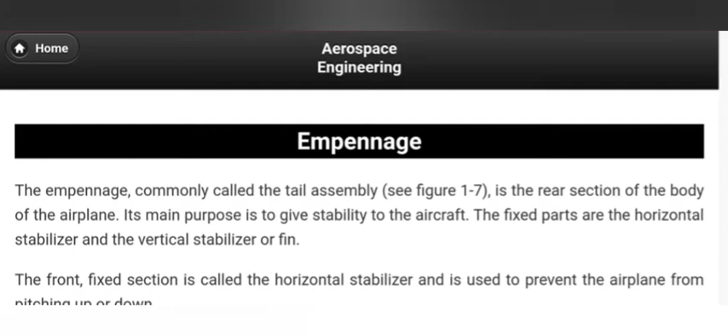The front fixed section is called the horizontal stabilizer and is used to prevent the airplane from pitching up or down. The rear section is called the elevator and is usually hinged to the horizontal stabilizer. The elevator is a movable airfoil that controls up and down motion of the aircraft's nose.

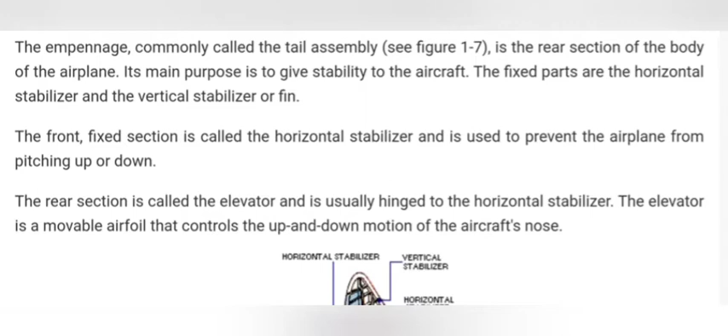The vertical tail structure is divided into vertical stabilizer and the rudder. The front section is called the vertical stabilizer and is used to prevent the aircraft from yawing back and forth. The principle behind its operation is much like the principle of a deep keel on a sailboat.

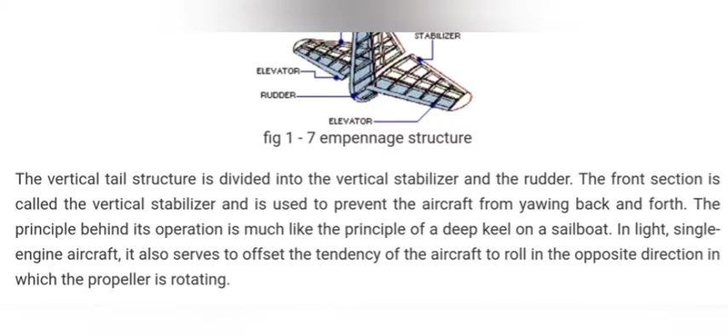In light single-engine aircraft, it also serves to offset the tendency of the aircraft to roll in the opposite direction in which the propeller is rotating. The rear section of the vertical structure is the rudder. It is a movable airfoil that is used to turn the aircraft.

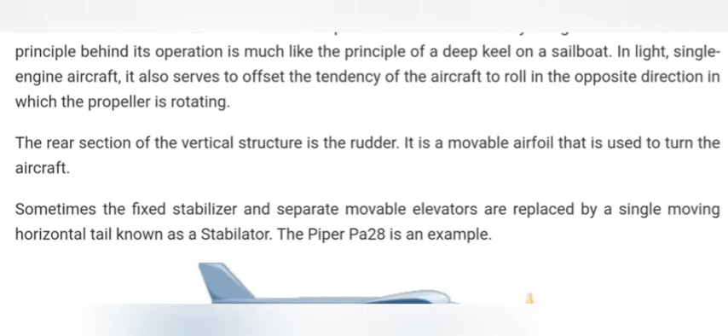Sometimes the fixed stabilizer and separate movable elevators are replaced by a single moving horizontal tail known as a stabilator. The Piper PA-28 is an example. The picture shown is the column in straight and level flight. Pull back to climb, push forward to descend.

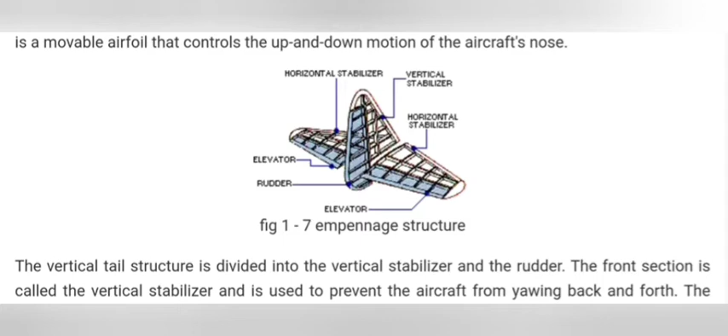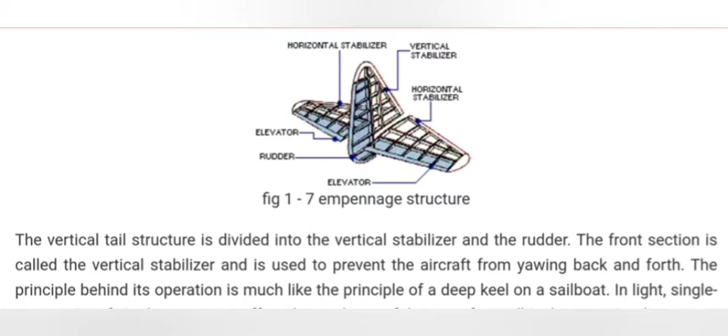This picture shows the tail section having a horizontal stabilizer, vertical stabilizer, and an elevator attached to the horizontal stabilizer and a rudder hinged to the vertical stabilizer. The rudder is used to turn the aircraft left and right, that is called yawing, and the elevator is used to pitch the aircraft up and down.

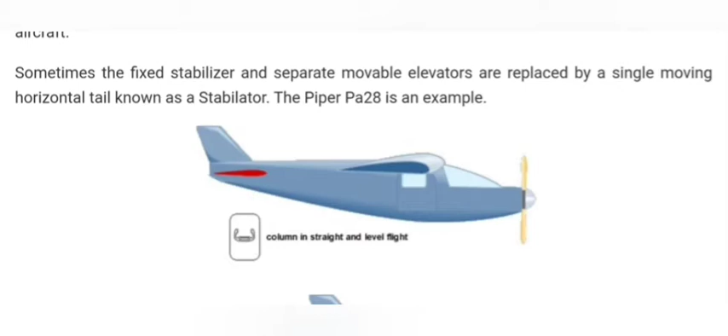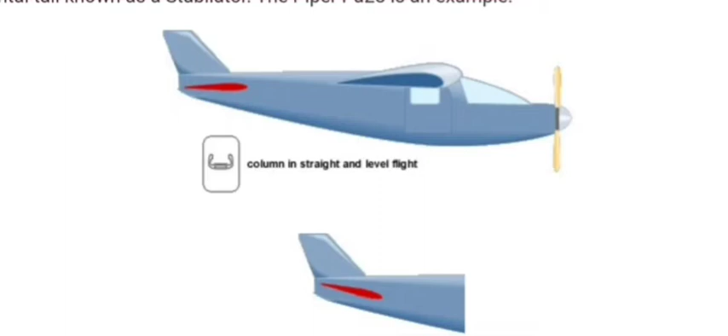The fixed stabilizer and separate movable elevators are replaced by a single moving horizontal tail known as a stabilator. Piper PA-28 is shown in the example. If we don't move the control stick, the flight will be straight and stable. It is in level flight.

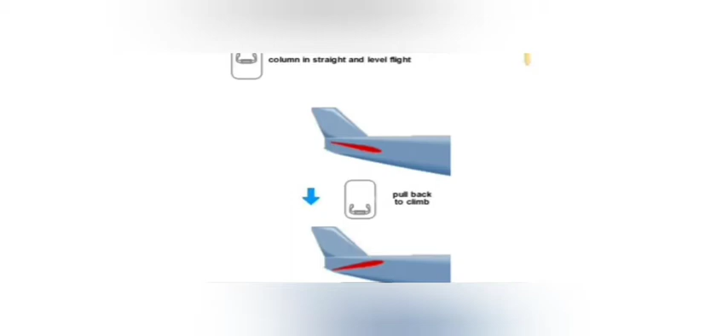If we pull back the control stick, the aircraft moves upwards. That is, if we pull back the control stick, the aircraft pitches up. If we push forward the control stick, the aircraft moves down, that is, the aircraft descends.

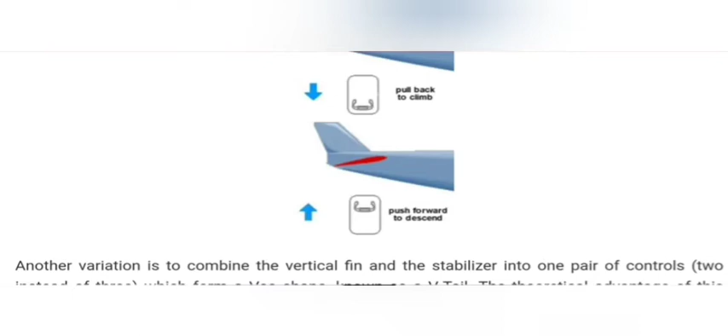Horizontal stabilizer moves downwards. Another variation is to combine the vertical fin and the stabilizer into one pair of controls, 2 instead of 3, which form a V shape known as a V-tail. The theoretical advantage of this design is the reduced interference drag associated with 2 surfaces instead of 3. On the V-tail, the combined rudders and elevators are known as ruddervators.

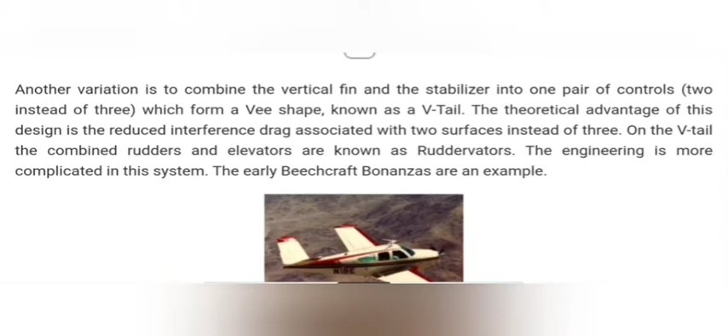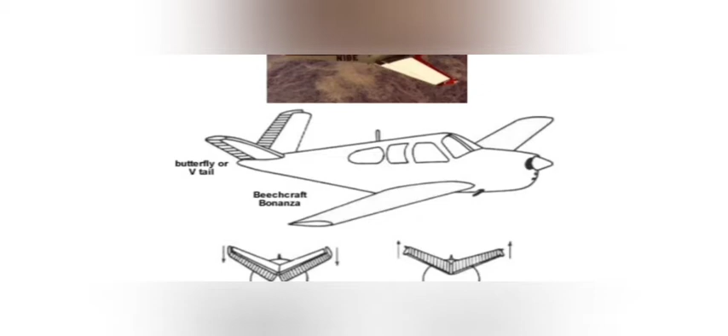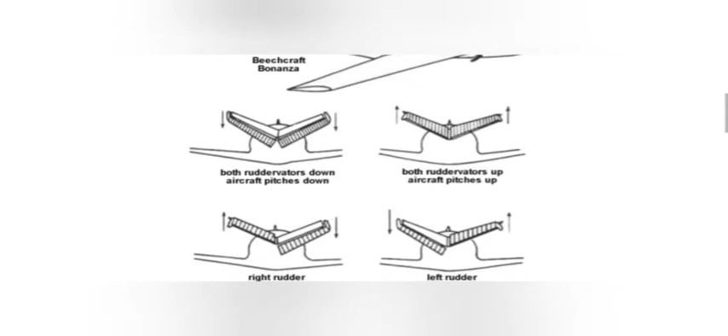The engineering is more complicated in this system. The early Beechcraft Bonanzas are an example. Actually, in this, the rudder and elevator are combined together as a V-shaped tail section. This diagram shows a butterfly or V-tail tail section of a Beechcraft Bonanza. This is the elaborate view of the Beechcraft Bonanza aircraft.

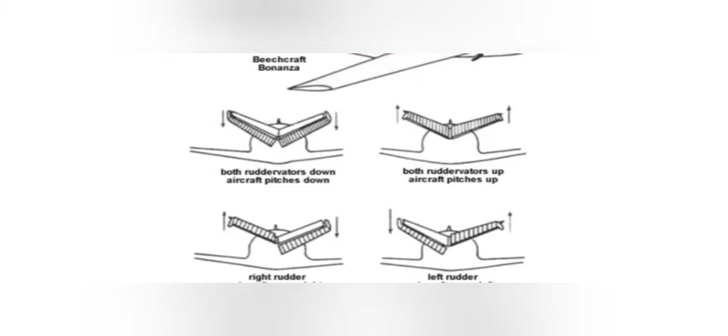Both rudders down, aircraft pitches down. Both ruddervators down, so the aircraft pitches down. Both ruddervators up, so the aircraft pitches up. Right rudder down means aircraft yaws right. Left rudder down means aircraft yaws left.

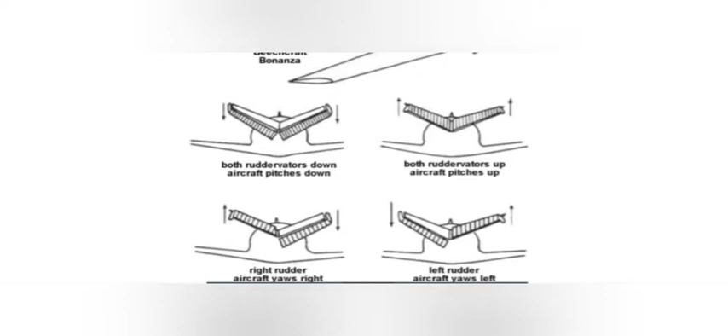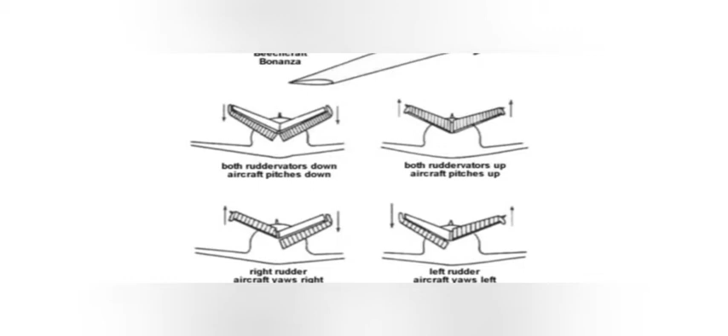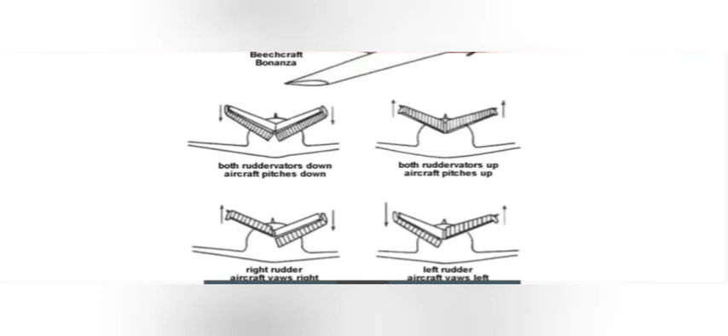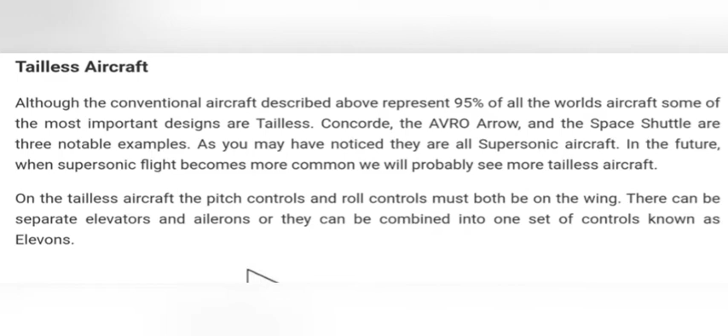Tailless aircraft. Although the conventional aircraft described above represent 95% of all the world's aircraft, some of the most important designs are tailless. Concorde, the Avro Arrow, and the Space Shuttle are three notable examples. As you may have noticed, they are all supersonic aircraft. In the future, when supersonic flight becomes more common, we will probably see more tailless aircraft.

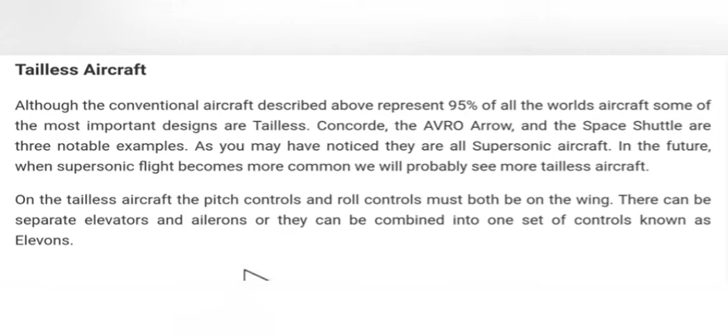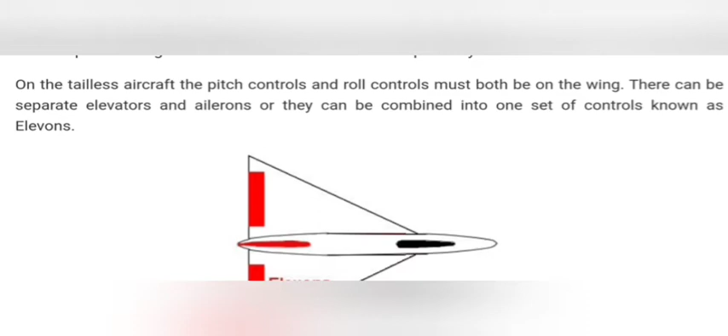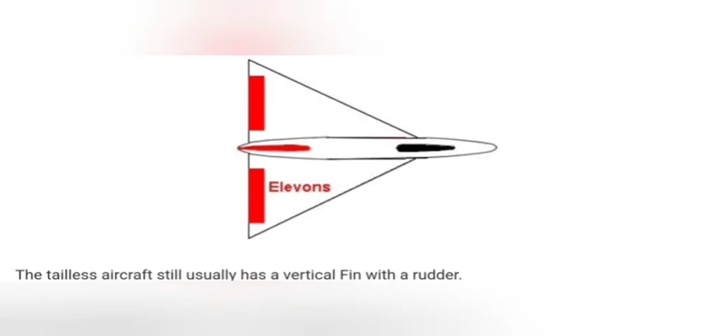On the tailless aircraft, the pitch controls and roll controls are both on the wing. There can be separate elevators and ailerons, or they can be combined into one set of controls known as elevons. In the tailless aircraft, the tail section is eliminated, and it is included in the wing itself as elevators and ailerons. It is called elevons. The picture shown is the wing of an aircraft having elevons. The center part is the rudder portion.

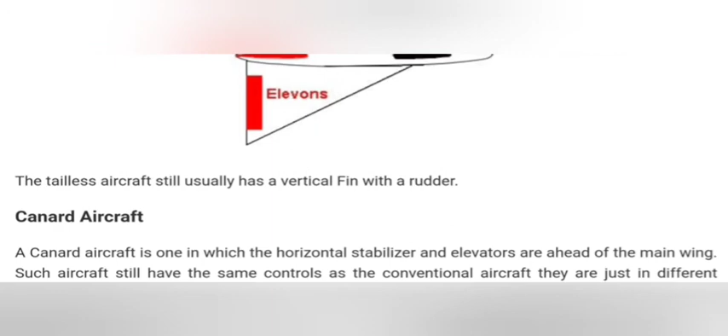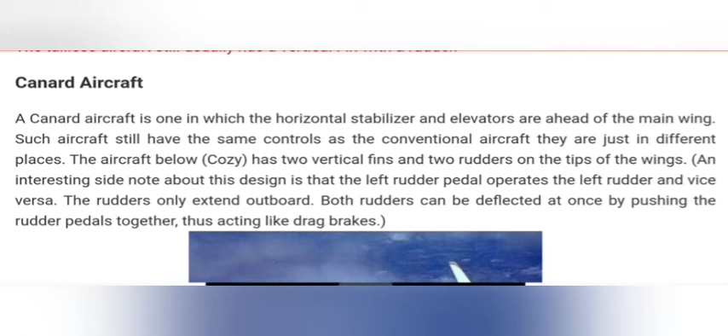The tailless aircraft still usually has a vertical fin with a rudder. Canard aircraft. A canard aircraft is one in which the horizontal stabilizer and the elevators are ahead of the main wing. Such aircraft still have the same control as the conventional aircraft. They are just in different places.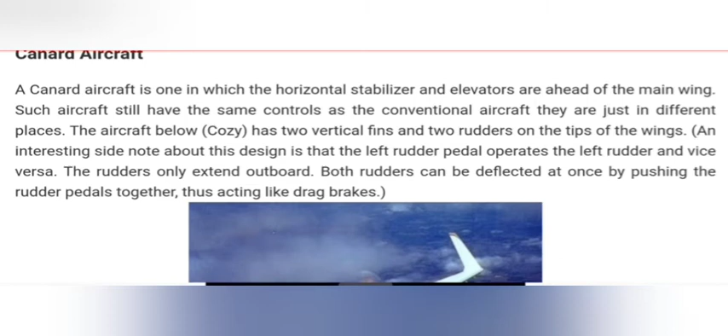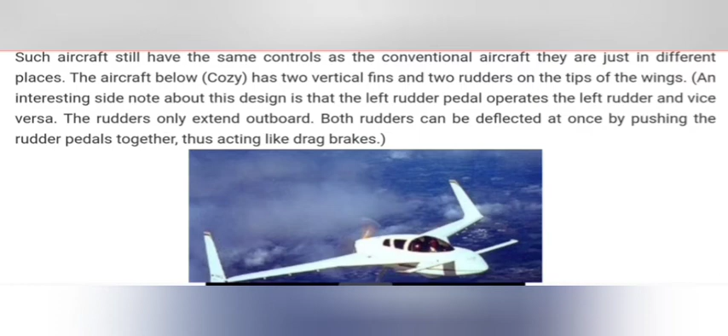The aircraft below has two vertical fins and two rudders on the tips of the wings. An interesting side note about this design is that the left rudder pedal operates the left rudder and vice versa. The rudders only extend outboard. Both rudders can be deflected at once by pushing the rudder pedals together. Thus, we can see the canard aircraft in the picture.

Here, the horizontal stabilizer and elevators are at the nose portion of the aircraft, that is ahead of the main wing, and it is helpful for pitching the aircraft up and down. The rudder is located at the tip of the main wing. Thus, the left rudder is operated by the left pedal by the pilot. The right rudder is operated by the right pedal by the pilot.

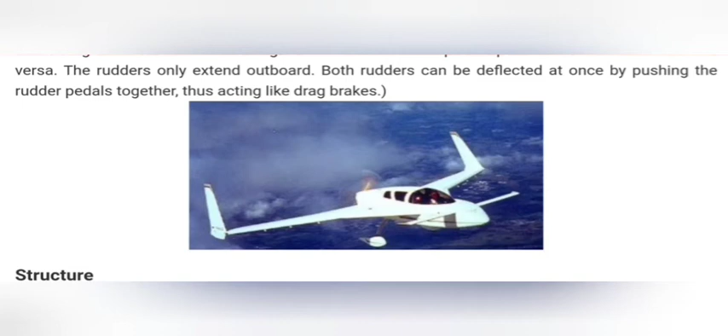The left pedal is used to turn the aircraft left. The right pedal turns the rudder right so that the aircraft turns right. If both the left and right pedals are pressed together, the rudders act like drag brakes. It is used to control the speed of the aircraft.

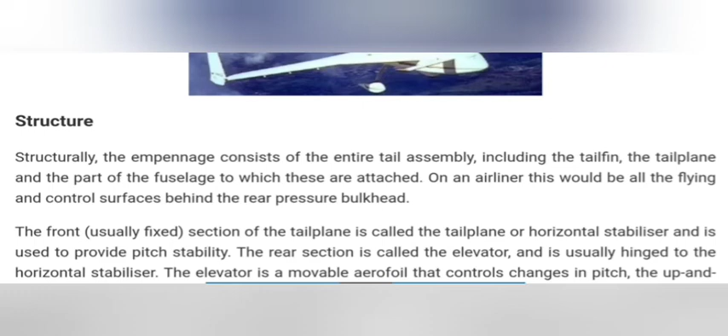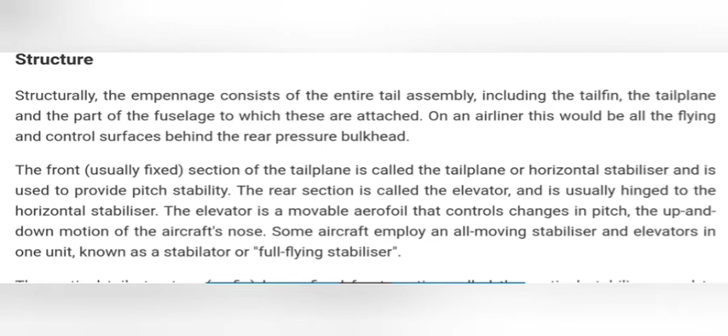Structurally, the empennage consists of the entire tail assembly, including the tail fin, the tail plane, and the part of the fuselage to which these are attached. On an airliner, this would be all the flying and control surfaces behind the rear pressure bulkhead.

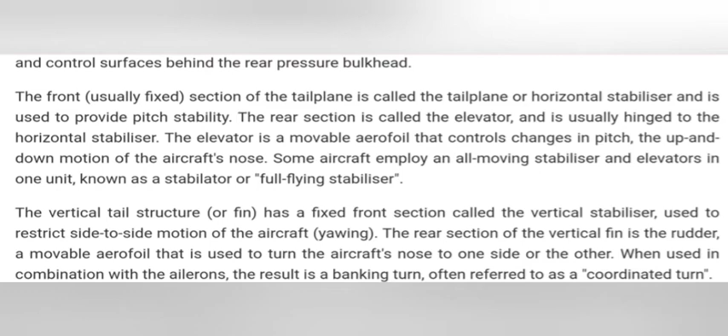The front, usually fixed section of the tail plane is called the tail plane or horizontal stabilizer and is used to provide pitch stability. The rear section is called the elevator and is usually hinged to the horizontal stabilizer. The elevator is a movable airfoil that controls changes in pitch, the up and down motion of the aircraft nose. Some aircraft employ an all-moving stabilizer, and elevators in one unit, known as a stabilator or full flying stabilizer.

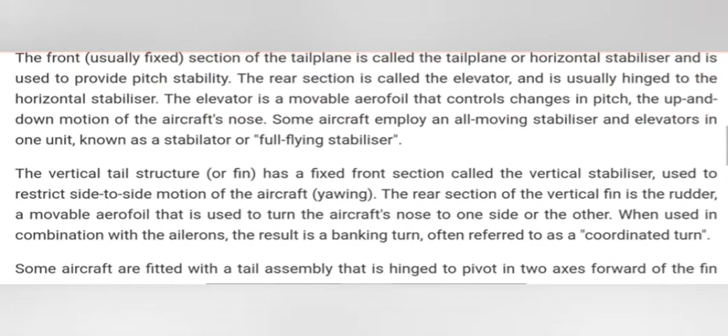The vertical tail structure or fin has a fixed front section called the vertical stabilizer, used to restrict side-to-side motion of the aircraft, yawing. The rear section of the vertical fin is the rudder, a movable airfoil that is used to turn the aircraft's nose to one side or the other. When used in combination with the ailerons, the result is a banking turn, often referred to as a coordinated turn.

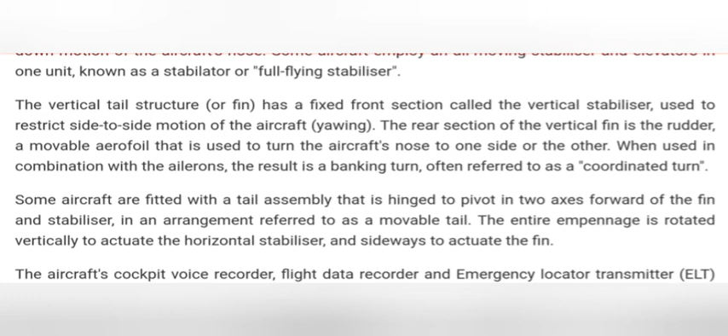Some aircraft are fitted with a tail assembly that is hinged to pivot in two axes forward of the fin and stabilizer, in an arrangement referred to as a movable tail. The entire empennage is rotated vertically to actuate the horizontal stabilizer and sideways to actuate the fin. The aircraft's cockpit voice recorder, flight data recorder, and emergency locator transmitter (ELT) are often located in the empennage because the aft of the aircraft provides better protection for these in most aircraft crashes.

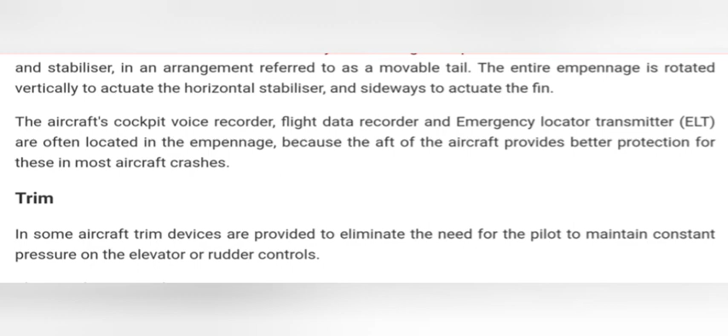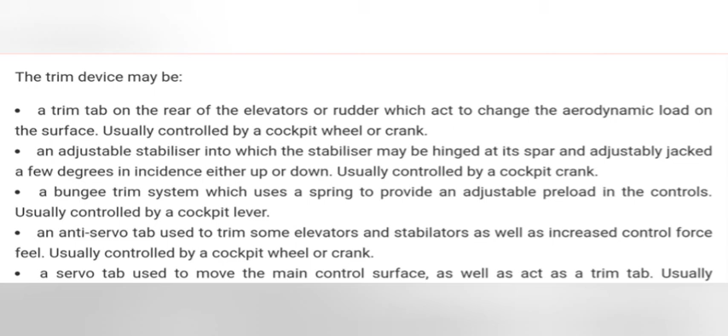Trim. In some aircraft, trim devices are provided to eliminate the need for the pilot to maintain constant pressure on the elevator or rudder controls. The trim device may be a trim tab on the rear of the elevators or rudder, which acts to change the aerodynamic load on the surface, usually controlled by a cockpit wheel or crank. An adjustable stabilizer, in which the stabilizer may be hinged at its spar and adjustably jacked a few degrees in incidence either up or down, usually controlled by a cockpit crank.

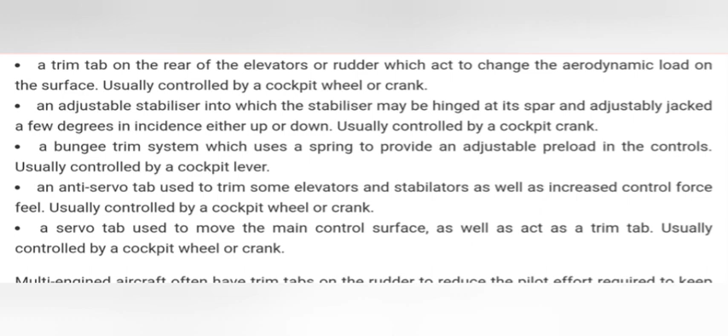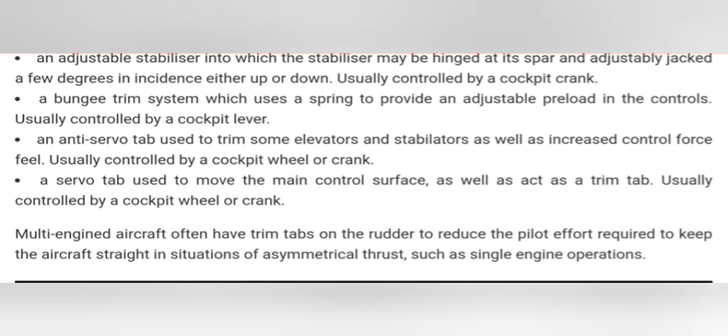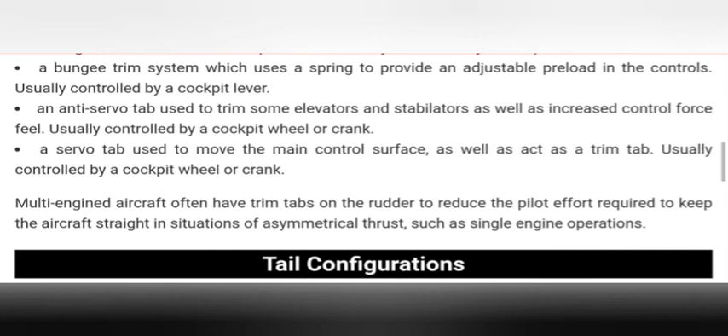A bungee trim system, which uses a spring to provide an adjustable preload in the controls, usually controlled by a cockpit lever. An anti-servo tab used to trim some elevators and stabilators as well as increase control force feel, usually controlled by a cockpit wheel or crank. A servo tab used to move the main control surface as well as act as a trim tab, usually controlled by a cockpit wheel or crank. Multi-engine aircraft often have trim tabs on the rudder to reduce the pilot effort required to keep the aircraft straight in situations of asymmetrical thrust, such as single-engine operations.

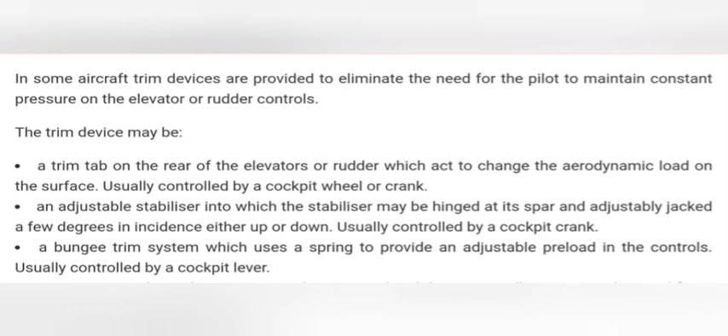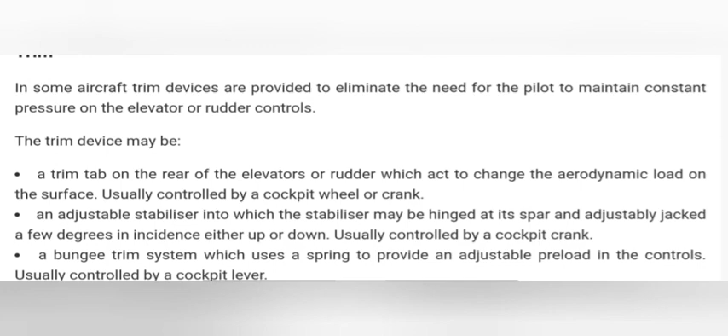Actually, in some aircraft, in the elevators and the rudders, trim devices are used, such as trim tabs, adjustable stabilizers, a bungee trim system, or a servo tab. Like this, these categories or types are used in the horizontal stabilizer and vertical stabilizer. Actually, these trim tabs are used for eliminating the constant pressure on the elevators or rudders. The aerodynamic load is eliminated in the horizontal and vertical stabilizers.